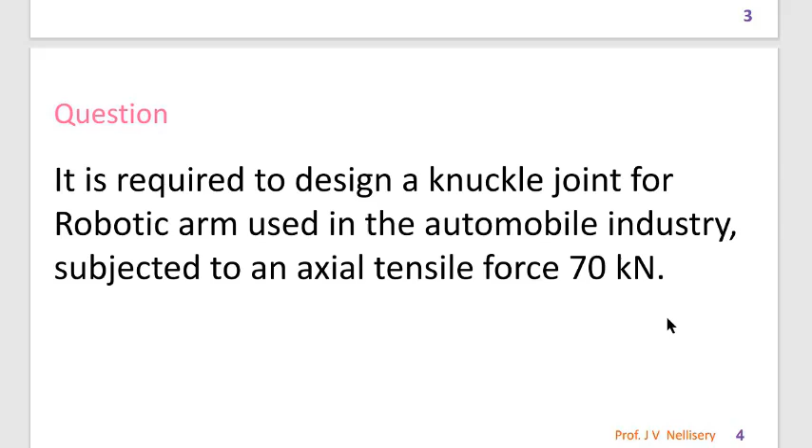Let us look into the question. It is required to design a knuckle joint for the robotic arm used in the automobile industry, subjected to an axial tensile force of 70 kilonewton.

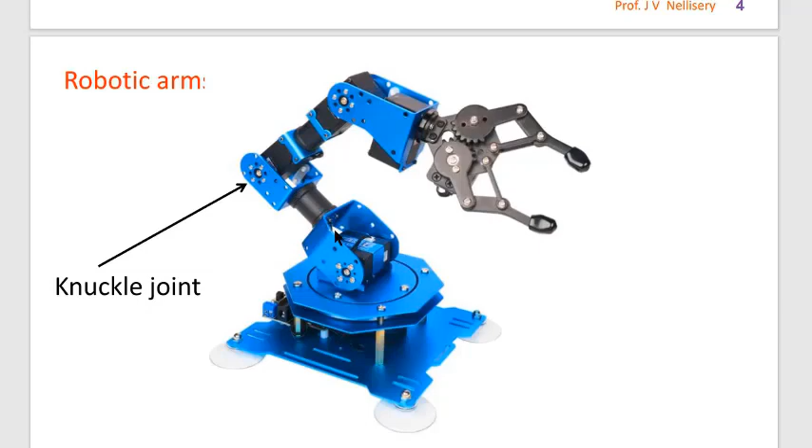This is the picture of the knuckle joint. As you can see, here you have the fork end and here you have the eye. The eye is further connected to another eye, and the fork is connected to another fork. So we will be designing this particular part.

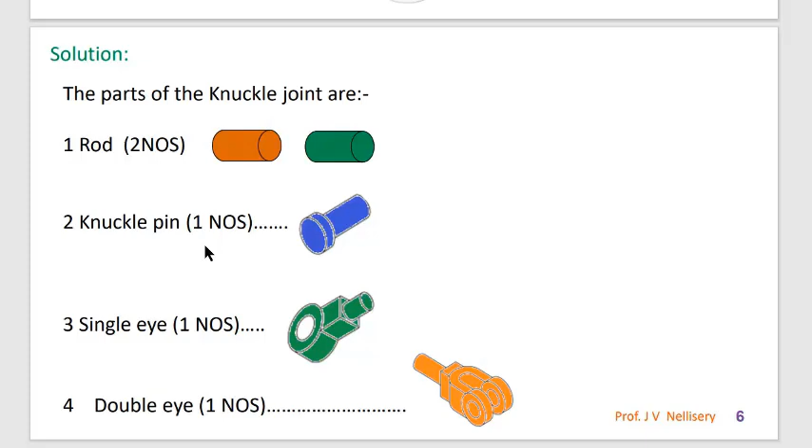Let us take a simplified version of the knuckle joint. These are the parts of the knuckle joint. We have a rod, which consists of the fork as well as the eye end. There is a knuckle pin, which connects the fork and the eye. The single eye looks like this. We have a double eye, also called the fork. These are some of the parts in the knuckle joint.

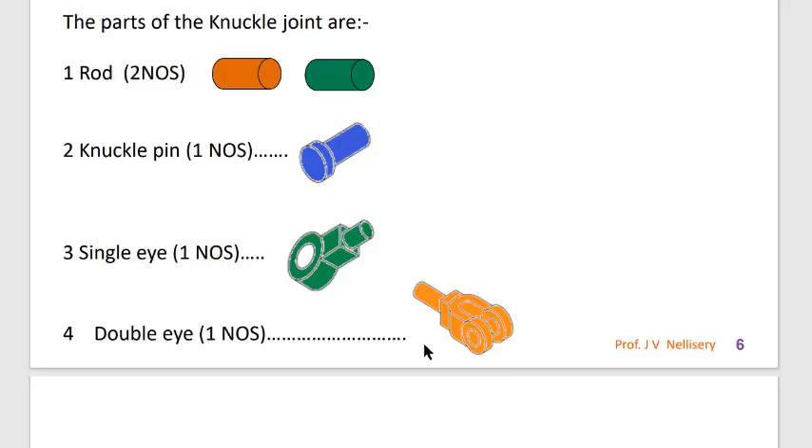The assembly of the knuckle joint consists of something like this, where the single eye comes and mates with the double eye. The single eye leaf looks like this, whereas the double eye has two leaves. The single eye is placed in between the leaves of the double eye. After this, the knuckle pin passes through the double eye and the single eye. Hence, we form the assembly of the knuckle joint. It's a very simple assembly and it is easy to manufacture, and you can observe the knuckle joint in many joints nearby.

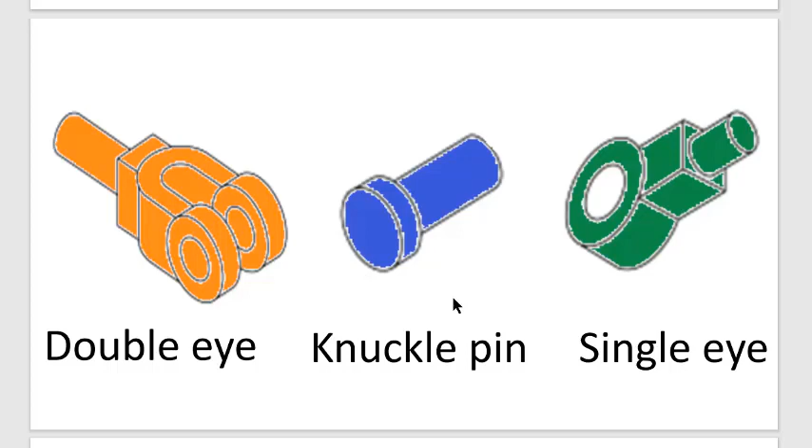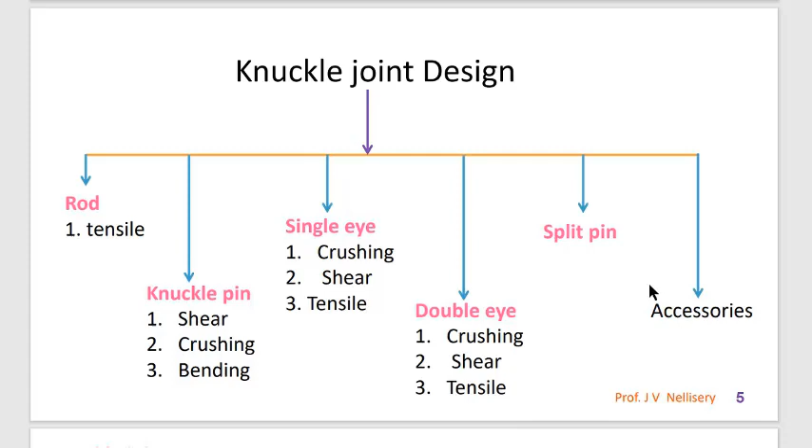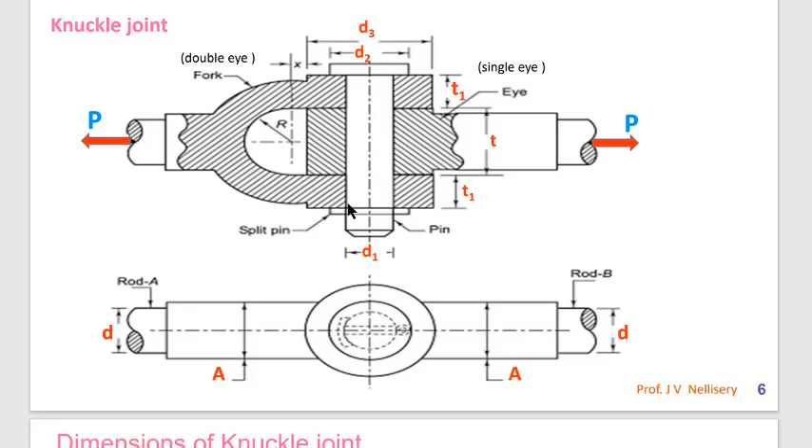Let us look into the assembly diagram of the knuckle joint. Here you can see the double eye and the single eye, through which the pin passes. D1 is the diameter of the knuckle pin, whereas D2 is the diameter of the knuckle pin head. D3 is the outer diameter of the leaf of the fork as well as the eye. The knuckle joint is subjected to a load of P. Here you have thickness T for the eye end and thickness T1 for the double eye end. This is the front view and here we have the top view. The dimensions are defined in this manner. So these are some of the critical parameters with respect to the knuckle joint.

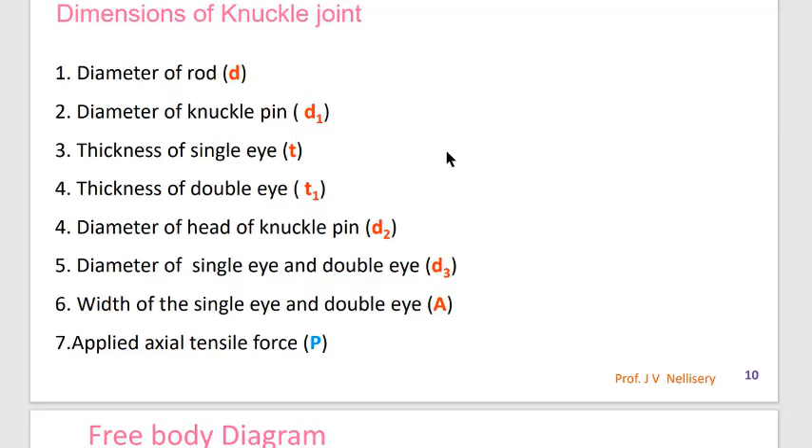Let us look into the free body diagram of the knuckle joint. The knuckle joint is designed with respect to the free body diagram, constructed using the principle that actions and reactions are equal and opposite. The sum of all horizontal forces acting on individual parts must equal zero. Here in the figure there is an applied force P, and because of this, on the double eye there is an induced force P by 2 above and P by 2 below. The total force acting on the double eye cancels out, whereas on the left hand side you can see P, and adding P by 2 and P by 2, the horizontal forces become zero on the double eye.

On the eye end, one can observe that external applied force P is applied. The reaction force for this is the applied force P, which is opposite in direction. Now this is how the horizontal forces on the single eye equal zero.

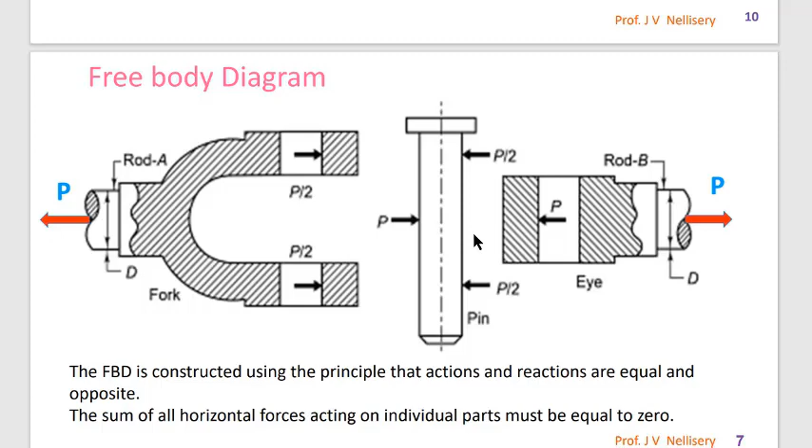Because of this force on the single eye, onto the knuckle pin there is again an equal and opposite force P acting. On the right hand side there is a force P by 2 and P by 2, due to the leaves of the double eye. On the double eye we have a force P by 2 in this direction and P by 2 in this direction. At the same time, there is an opposite force P by 2 on the knuckle pin in this direction, as well as P by 2 in this direction. Both directions are opposite and the magnitudes are equal, and that's why the horizontal forces on the knuckle pin equal zero. Hence, we have understood the forces on the knuckle joint.

Let us look into the assumptions of the knuckle joint. The rods are subjected to axial tensile force. The material is homogeneous, isotropic, and obeys Hooke's law. The effect of stress concentration due to slots and steps is neglected. The force is uniformly distributed in various parts.

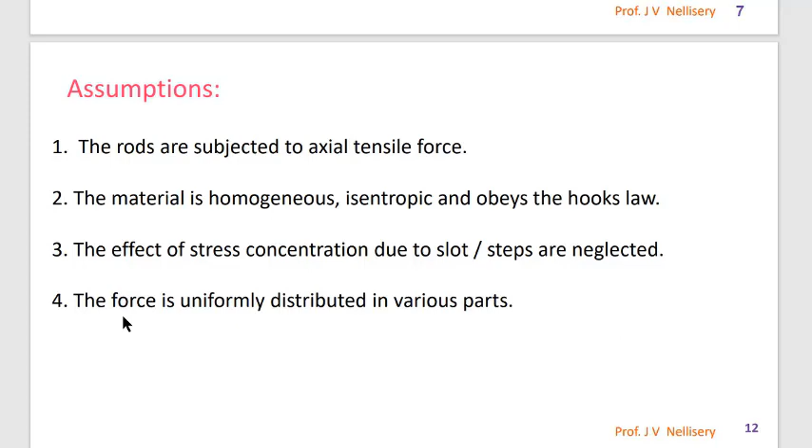Now, the material assigned to all the parts, let us assume it to be the same. We have taken plain carbon steel C40 as the material, and the yield tensile strength for that is 33 kgf per mm square, with reference to design data book PSG page number 1.9. We have selected this material because it is easily available in the factory.

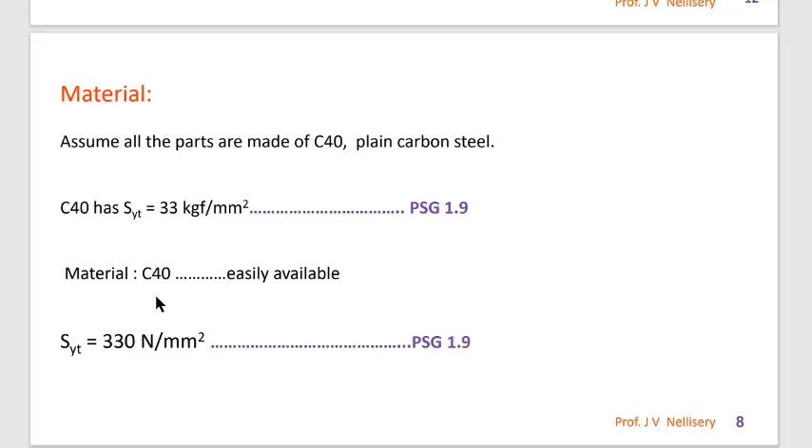Now let us convert this SYT in terms of Newton per mm square. So this becomes 330 Newton per mm square.

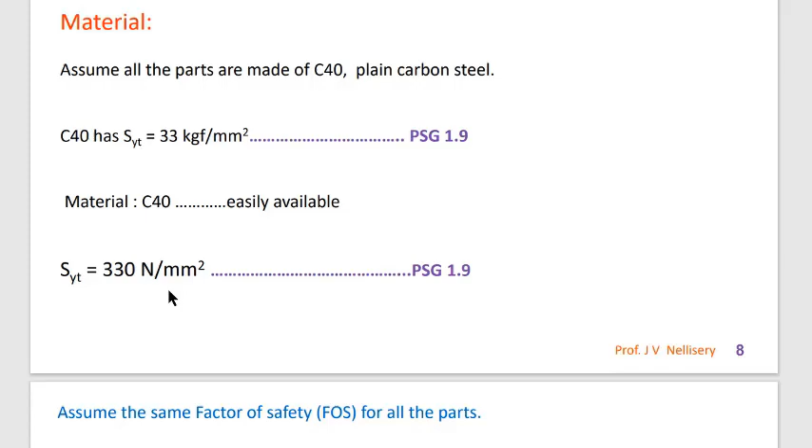Assume the same factor of safety for all the parts with respect to the knuckle joint. For direct axial load, the factor of safety is taken as 2 when it is a dead load, with reference to V M Faires as given in PSG page number 1.43. Hence, for a direct axial load, we have taken factor of safety as 2. An additional factor is taken to accommodate stress concentration factor, that is 1. So when we add this, the final factor of safety becomes 3.

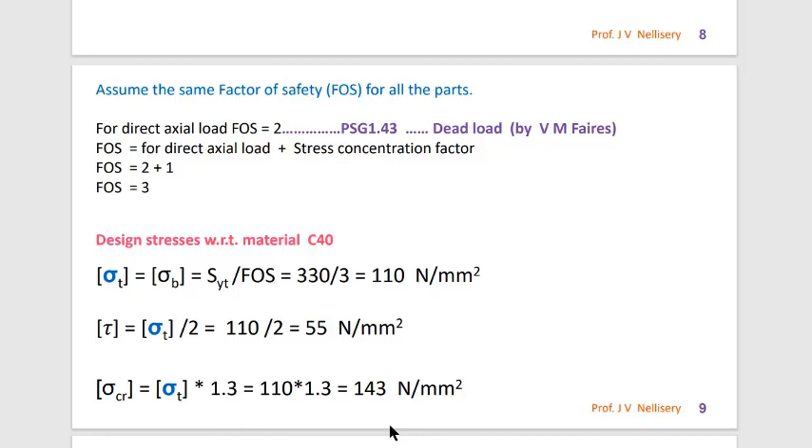Design stresses with respect to the material C40 can be taken in the following manner. Design sigma T is equivalent to design sigma B, which is SYT upon factor of safety, that comes around 110 Newton per mm square. Design tau is equal to design sigma T by 2, so that comes around 55 Newton per mm square, and design sigma CR is equal to design sigma T multiplied by 1.3, so it comes around 143 Newton per mm square. Let us start the design.

So induced sigma T is equal to P upon pi by 4 D square, less than equal to design sigma T. When we put in the values, we can find D as 28.46 mm, which can be approximated to 29 mm.

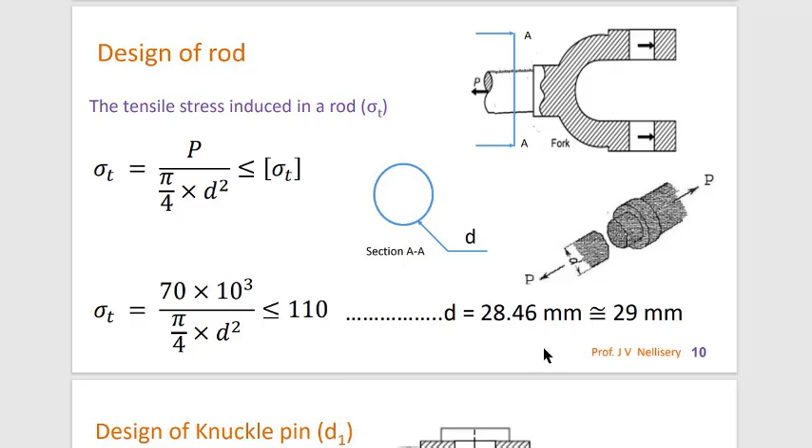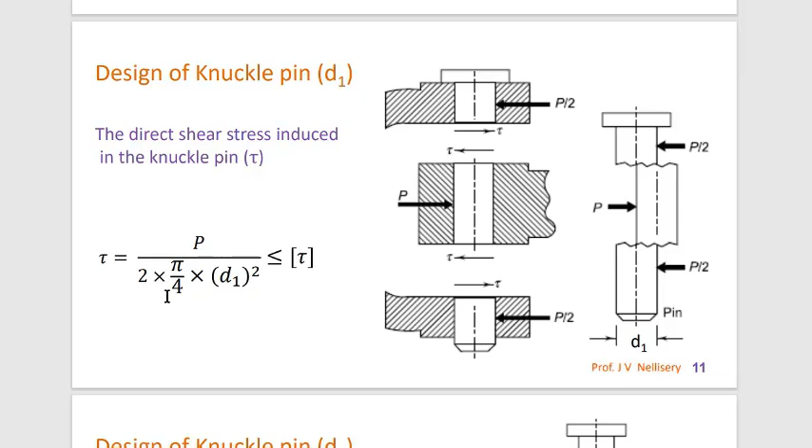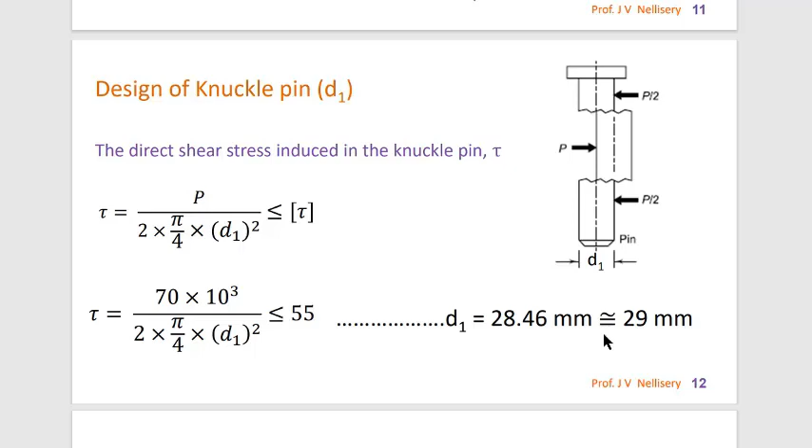This is a double shear condition, and the diameter of the pin, as shown here, is given as d1. So we put it as pi by 4 d1 square. d1 is the diameter of the knuckle pin, and we put the values into the formula, where P is 70 into 10 raised to 3, design tau is 55, and we find the value of d1. Here d1 comes around 28.46 mm, which can be approximated as 29 mm.

Let us look into the crushing stress induced in the knuckle pin due to the single eye end. The knuckle pin picture is given here, and whenever we consider the induced crushing stress, the area considered is always the projected area. Since the whole cylinder is subjected to the crushing stress, the projected area will appear like a rectangle, and the area is d1 into T.

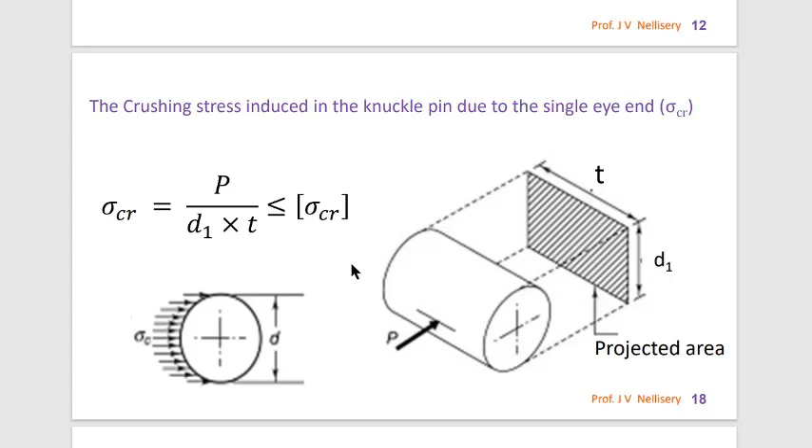In this equation, we know the value of P, we know the value of D1, and we know the value of design sigma CR. So by this formula, we can find out the thickness T of the knuckle pin. Let us place in the known values after substitution. We get the T value as 16.87 mm, which can be approximated as 17 mm.

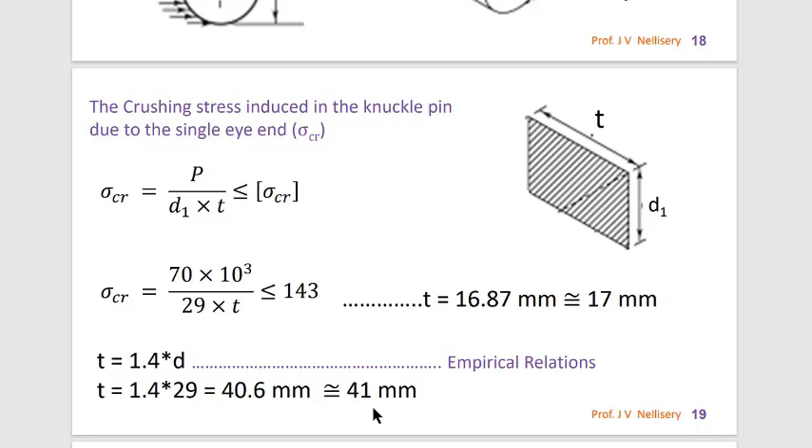Now, using empirical relation, we can say that thickness of the single eye T is equal to 1.4 times D, and therefore T becomes around 40.6 mm, which can be approximated as 41 mm. By experience, they have said that the T value should not be 17 mm, which is very less, but approximated to 41 mm, which is a safe value and depends upon the experience of the designer.

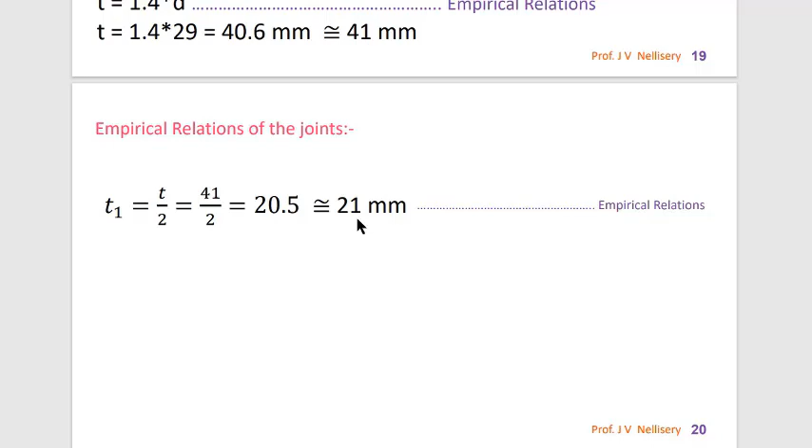We also have another empirical relation for T1. T1 is equal to T by 2, which can be calculated as 20.5 and approximated as 21 mm. Here T1 is the thickness of the double eye.

Let us study the bending stress induced in the knuckle pin. Bending happens due to the opposite forces acting on the knuckle pin with respect to the single eye and the double eye. The bending analysis of the knuckle pin is considered as a simply supported beam with uniformly distributed load acting in the middle portion due to single eye, and uniformly varying load acting in the remaining end portion due to double eye.

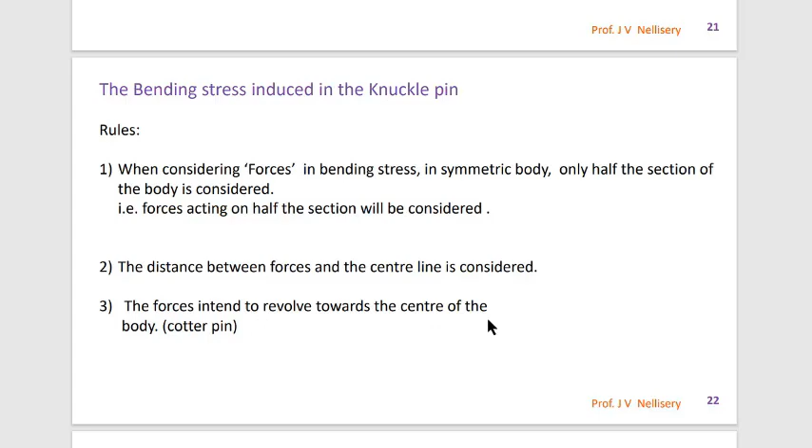When considering forces in bending stress in a symmetric body, only half of the section of the body is considered, that is, forces acting on half the section. Second, the distance between the force and the central line is considered. Third, the forces tend to revolve towards the center of the body with respect to the cotter pin.

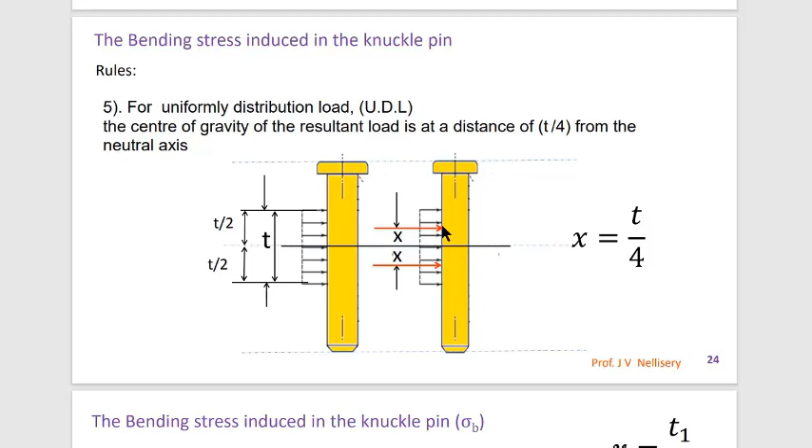Let us look into the uniformly distributed load, UDL. The center of gravity of the resultant load is at a distance of T by 4 from the neutral axis. In the figure, this line is the neutral axis, the central line, and you can see the uniformly distributed load at the upper section and the lower section. Only one section is considered. Looking at the upper section, the point load acts at a distance x, and this x distance will always be T by 4. This is another point to consider.

The uniformly distributed load is divided into two sections, the upper section and the lower section. The length of the uniformly distributed load at the upper section is given as T by 2. In bending stress, we only consider the upper section.

The uniformly distributed load can be converted into a point load as shown in this figure. The point load acts at a distance of T by 4 from the neutral axis, with magnitude P by 2. You can also see that a P by 2 load acts at the bottom section also at distance T by 4.

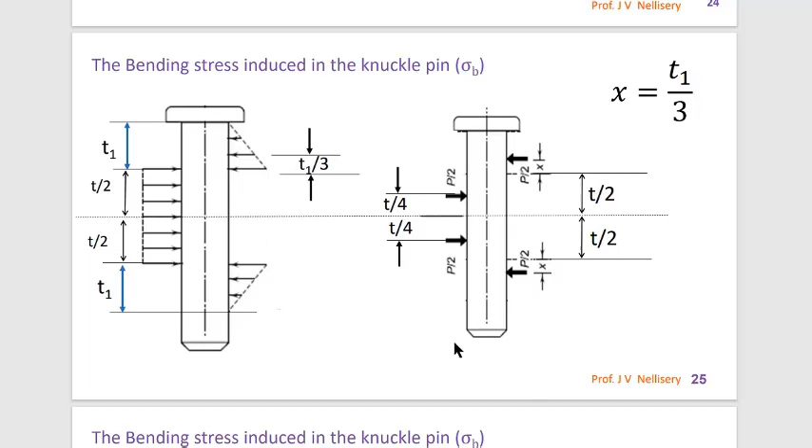Once we understand this diagram, we can find the maximum moment acting on this body. To find the maximum moment, we consider that these forces tend to revolve at the center of the pin. Let us take the force situated at the top, where P by 2 acts at a distance of x plus T by 2. So the force is P by 2, and the distance is T by 2 plus x, where x equals T1 by 3.

We have found the forces and their distances on the right hand side. The force on the right hand side and the force on the left hand side are opposite to each other, so we consider a minus sign for the force on the left hand side. On the left, the force is P by 2, acting at a distance of T by 4, as represented here. From this diagram, we obtain the maximum moment acting on the knuckle pin.

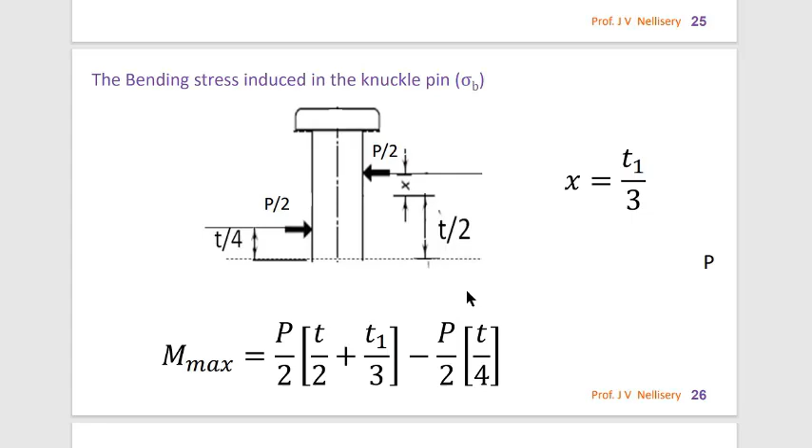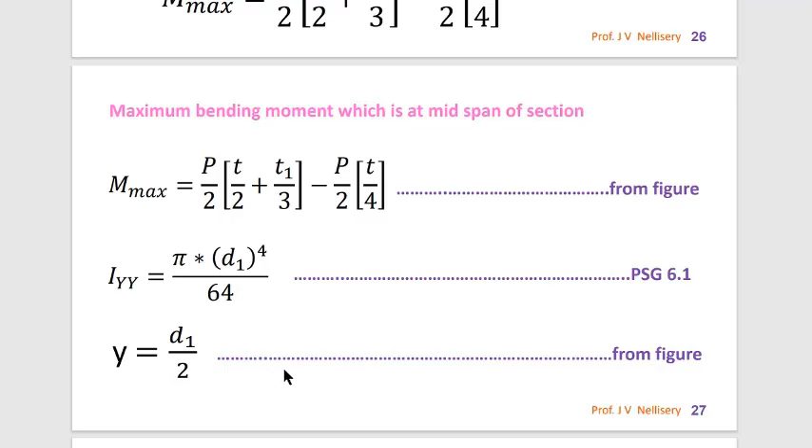Now we have several formulas: the maximum moment is found from the figure, where the area moment of inertia with respect to y is pi into d1 raised to 4, upon 64. This is specific to the circular section as given in PSG 6.1. We can find the distance of the maximum fiber from the neutral axis as d1 by 2, so y equals d1 by 2, the distance of the outermost fiber from the neutral axis.

The bending stress induced in the knuckle pin due to single eye and double eye can be calculated. In this formula, we know the value of M max and the design sigma t, and we can substitute the values of y and Iyy.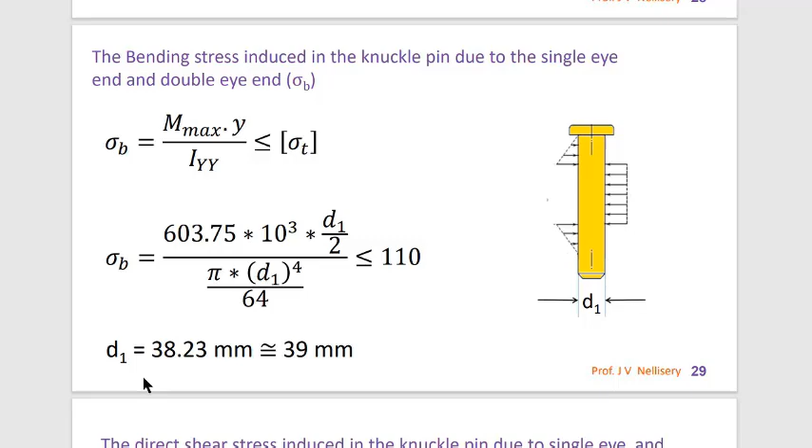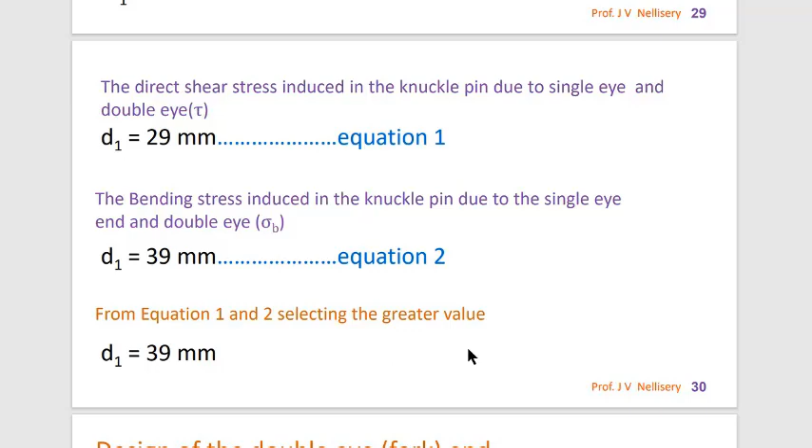In this particular equation, d1 is unknown, where d1 is the diameter of the knuckle pin. After substitution, diameter d1 comes around 39 mm approximately. We observe that we got d1 equal to 29 mm from the direct shear stress induced in the knuckle pin due to single eye and double eye. We also calculated d1 as 39 mm with respect to bending stress induced in the knuckle pin. Hence we have values from two different stresses, and we will be selecting the higher value. Hence, the final dimension of d1 is 39 mm.

The direct shear stress induced in the double eye due to knuckle pin. In this figure, one can observe that the knuckle pin is mating with the double eye. The knuckle pin is pulled in this direction and the double eye is pulled in that direction. Because they are pulled in opposite directions, two sections of the double eye get sheared off as seen in this diagram from this location. Now the shaded area is shown in blue color as seen here. These are the sheared areas which got broken off from the double eye.

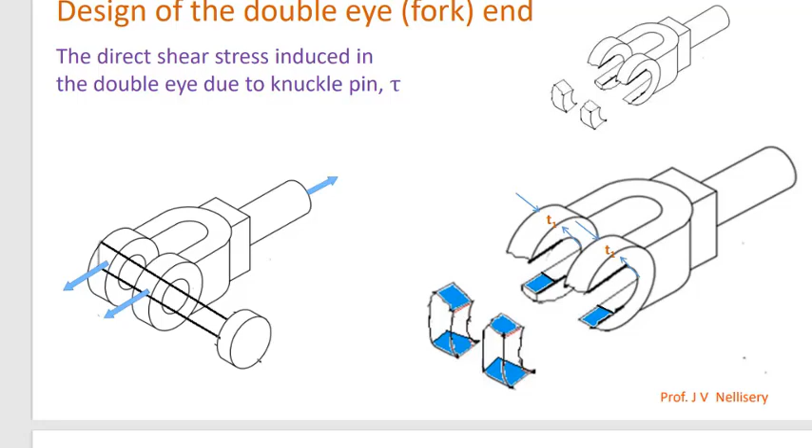Here T1 is known as the thickness of the single leaf. In both the leaves, thickness is T1. Now we are interested in these sections. Let us assume the sheared portion above and below. Here also we have sheared portion above and below. For the two sections we have above and below portions. Let us assume that the shaded portions have the same and equal area. So we are interested to find out this area. One parameter is known here, that is T1, because the thickness of the leaf is T1. So this parameter is T1.

To understand and find out the other parameter, we have to look into this figure. The outer diameter is given by D3 and the inner diameter here is given by D1. If we want to find half the diameter of the outer circle, it is given by d3 by 2, and half the diameter of the inner circle is d1 by 2. Now the red area is the break line, and we are interested to find the length of this line. So the length can be found as d3 by 2 minus d1 by 2. This gives the length of this red colored line. To find the area of this shaded portion, T1 multiplied by d3 by 2 minus d1 by 2 will give the area of the shaded portion.

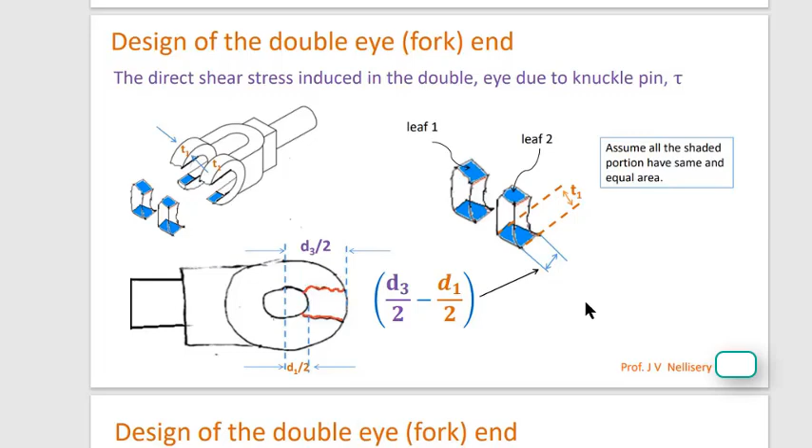Now let us look into the induced tau. The induced tau is equal to P upon area. We have found the area of the shaded portion, so we write that as d3 minus d1 upon 2 multiplied by t1. The first 2 here stands for double shear. Each section has above and below area, and that's why we call it a case of double shear, so a 2 is given for that. Now the rear 2 is for 2 leaves - leaf number 1 and leaf number 2, and that is the reason we have given 2 here. Now in this condition we have found induced tau and its formula.

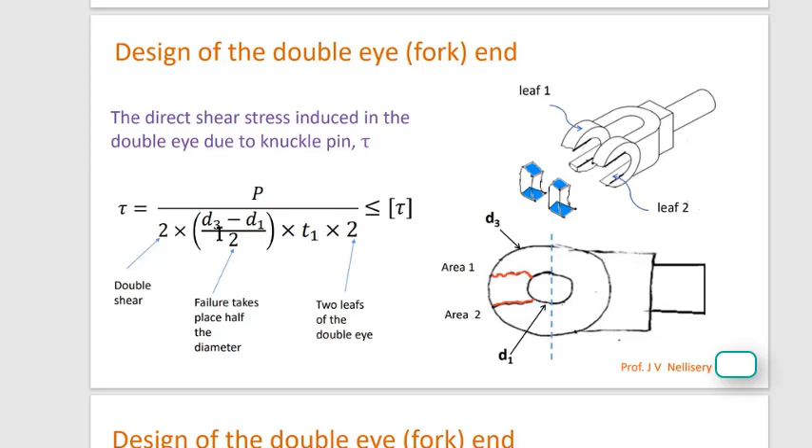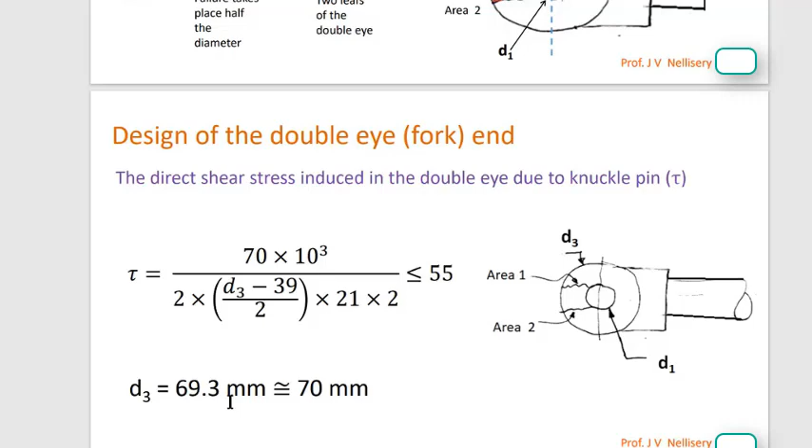Now we can put the known values and find the unknown values. We have substituted the known values, and the unknown parameter is d3. After substituting all values and equating it equal to 55, the d3 value comes around 69.3 mm, which can be approximated as 70 mm.

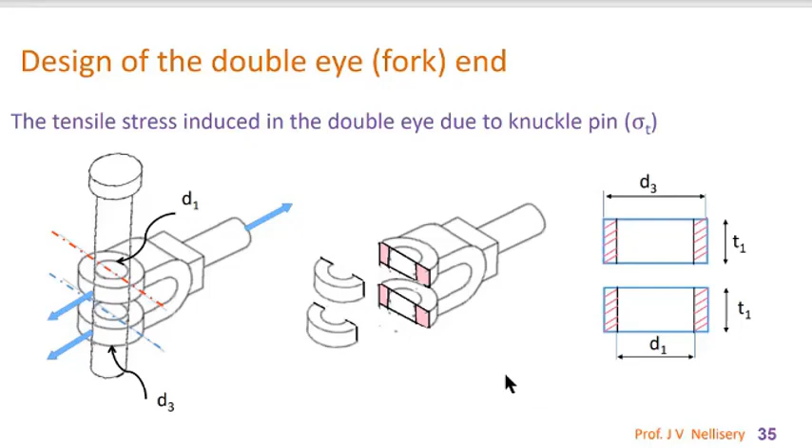Let us look into the tensile stress induced in the double eye due to the knuckle pin. Here the double eye is mating with the knuckle pin, and a tensile force is induced on the left hand side of the pin and on the right hand side of the double eye. Because of these tensile forces, the double eye divides itself into two parts - this is one part and that is the other part. The shaded area is the area under consideration, shown in this 2D diagram. One can observe this is how tensile failure takes place due to the tensile stress in the double eye.

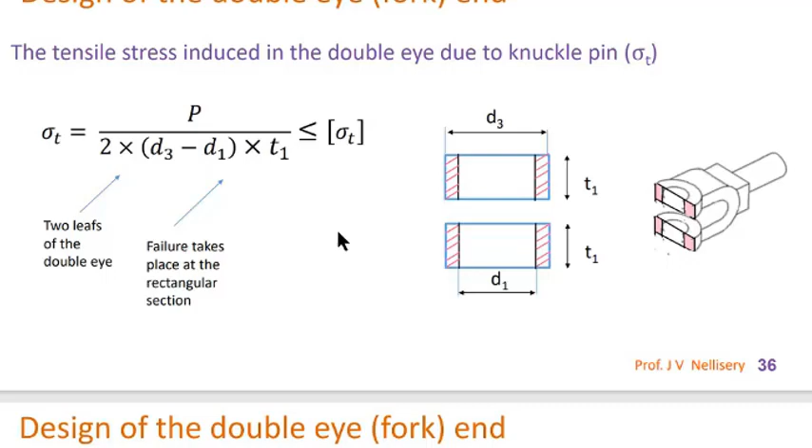Let us look into the calculation. Here the digit 2 is shown for the two leaves - leaf number 1 and leaf number 2. The shaded area can be given as d3 minus d1 multiplied by thickness t1. In this manner we find the shaded area and the formula for tensile stress. Let us put in all known values into the equation and find the induced tensile stress. The induced tensile stress is 53.76, which is quite lesser than the design tensile stress. Hence this section is safe.

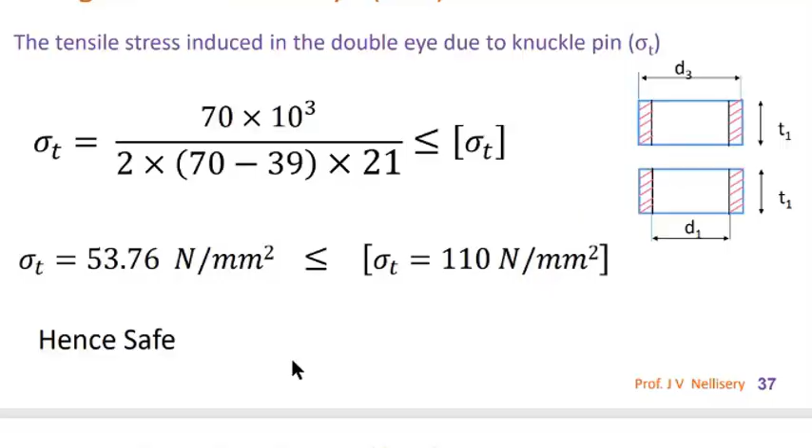Let us look into the crushing stress induced in the double eye due to the knuckle pin.

In this figure, we can observe that the double eye is being mated with the knuckle pin. The knuckle pin is being pulled to one side and the double eye is pulled to the other side. Because of this, the failure of the double eye occurs.

One can observe that the inner area is the crushed area, which is also the circumferential area. In the crushing stress, the circumferential area is converted into the projected area. The projected area appears like a rectangle, and this shaded area is the crushing area. Hence, in this manner, the failure of the double eye due to crushing stress occurs.

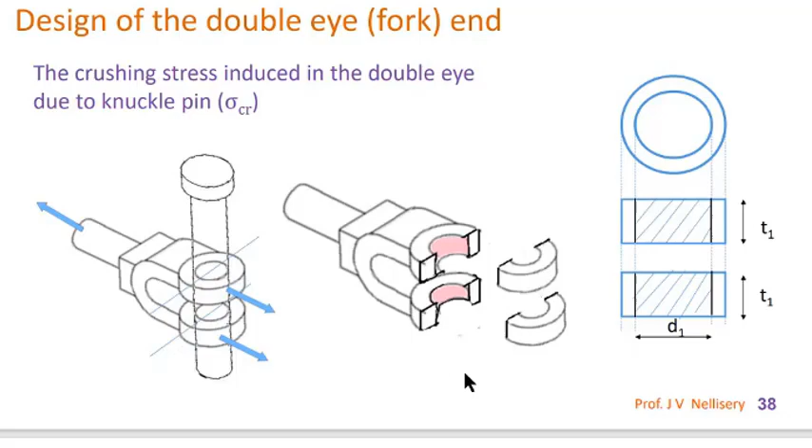Let us look into the formula. The two leaf of the double eye indicates the 2 digit here. Hence, there are 2 leaves, so we have multiplied by 2. The area is d1 multiplied by t1. This is the shaded area. Hence, we have d1 multiplied by t1 in the denominator.

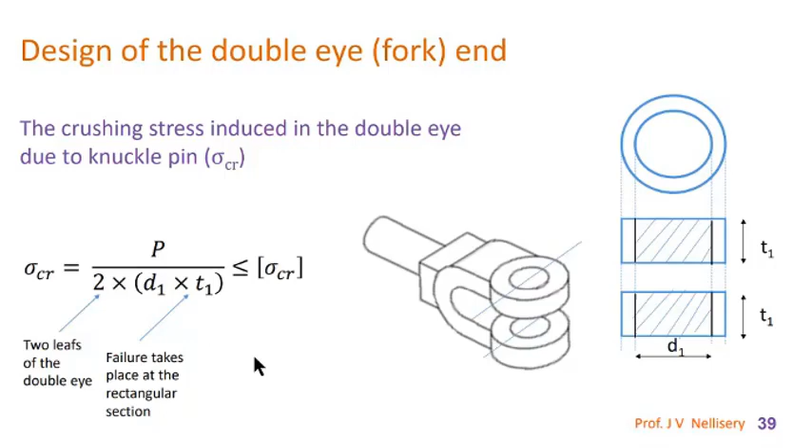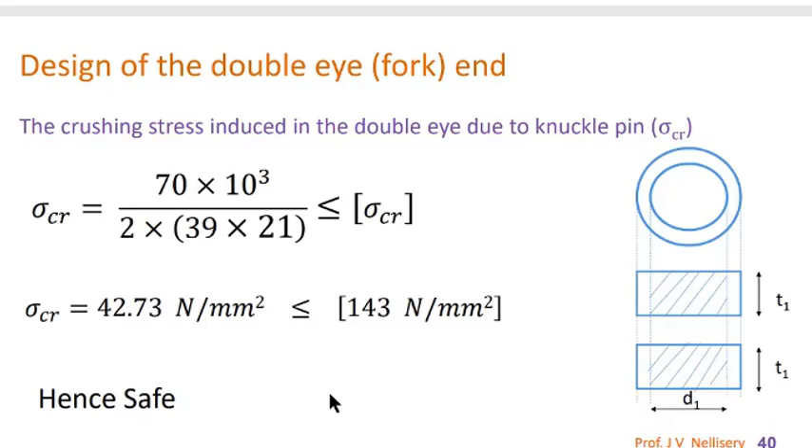Hence, this is the formula and we can put values and find out. After putting the values in the crushing stress, we can find out the induced crushing stress as 42.73, which is quite less in magnitude with respect to the design crushing stress, which is 143. Hence, we can say that this particular section is safe.

Let us consider the direct shear stress induced in the single eye due to the knuckle. Here one can observe that this particular eye end is mated with the knuckle pin, and because of the forces acting on it, this particular section of the single eye gets sheared off.

We can see this nicely in the 2D figure. In the 2D figure you can see the sheared area 1 and the sheared area 2. The small section gets sheared off. This particular section has two areas as shown in this figure. Hence, a digit 2 is multiplied, which indicates a double shear.

The length of sheared area can be said as d3 minus d1 upon 2, since it is half the diameter, and the thickness of the single eye is given as t. Hence, we have obtained the formula for the shear stress.

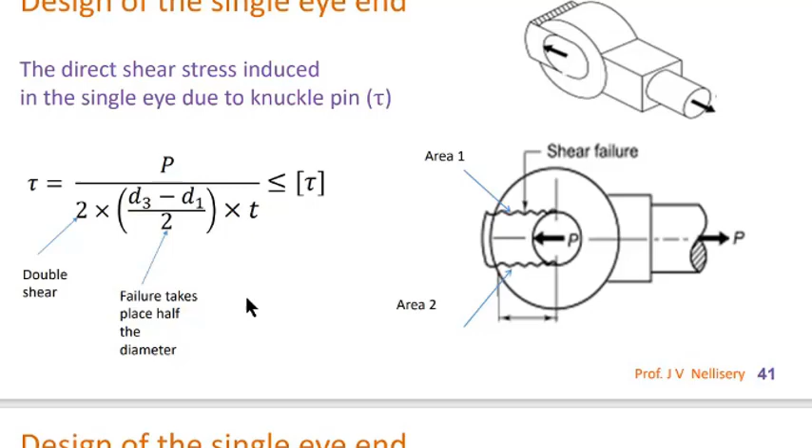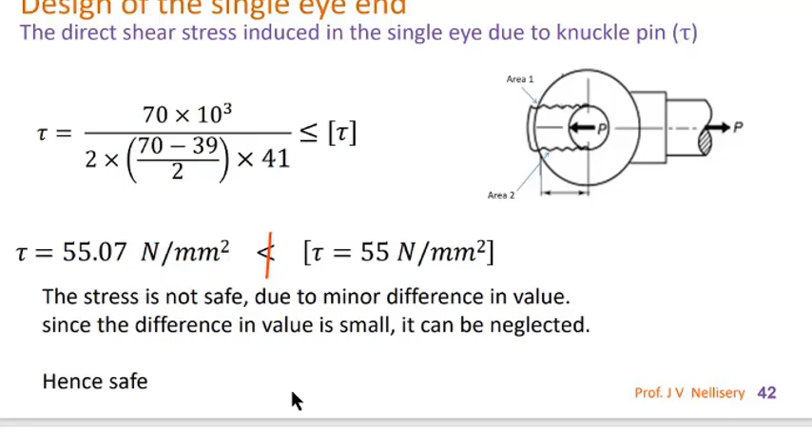Let us put in the values. After putting up the values, we can see that the magnitude of the shear stress is slightly more than the design tau value. This minor difference in the value can be neglected. Hence, we can say that this particular section is safe.

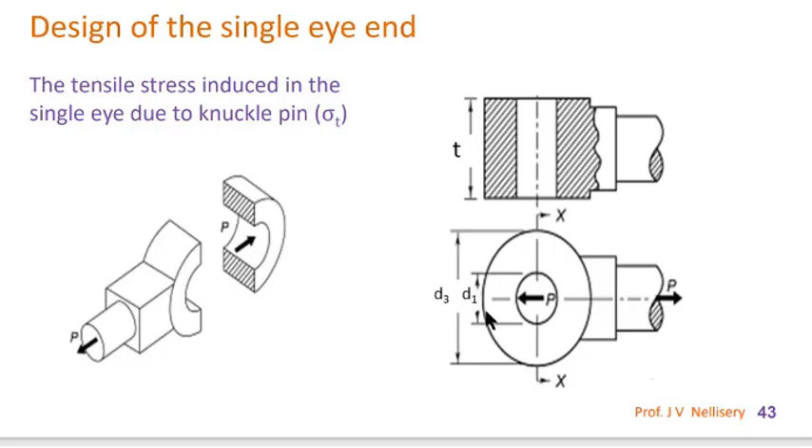In this 2D figure, one can observe that T is the thickness of the single eye, and D3 is the outer diameter of the single eye, and D1 is the inner diameter of the single eye. Let us derive the formula.

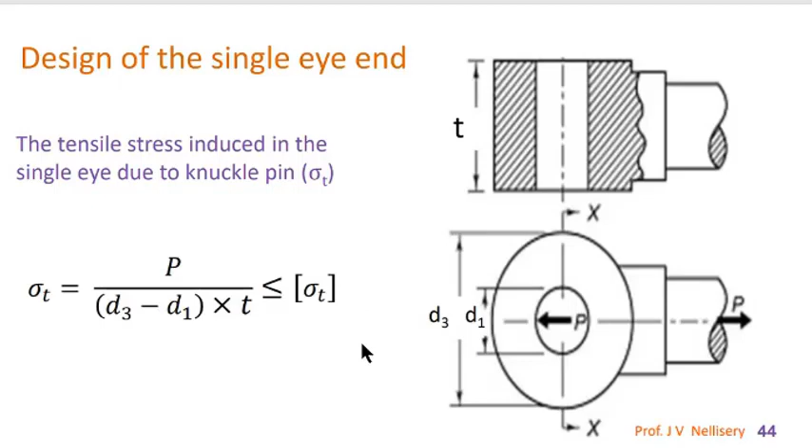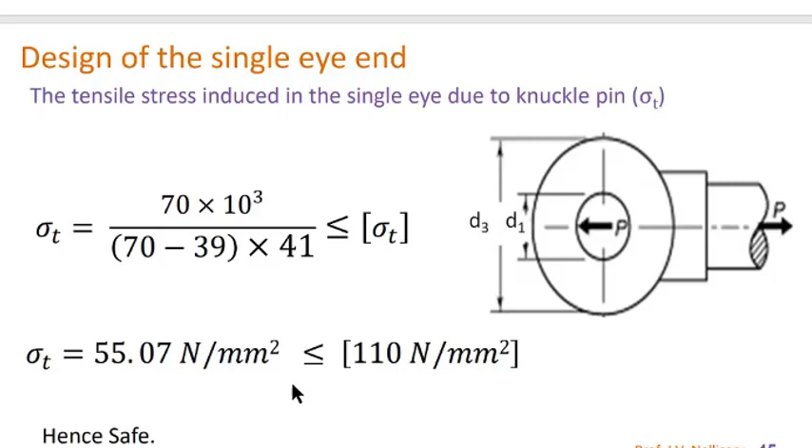The shaded area here can be derived as D3 minus D1 multiplied by T. So we get the shaded area. The shaded area is the tensile area. After putting in the values, one can observe that the induced tensile stress is 55.07 Newton per mm square, which is quite less than the design tensile stress. Hence, the section is safe in tensile stress.

Let us look into the crushing stress induced in the single eye due to the knuckle pin. Here we can see that the single eye and the knuckle pin are mating each other, and due to the forces, the inner surface of the single eye gets stressed. The inner surface is the circumferential area.

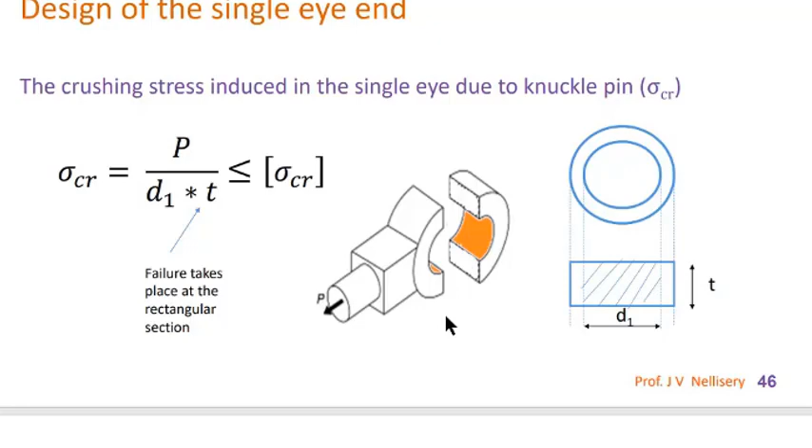One can see that in crushing stress, the circumferential area is converted into projected area. Here, the projected area looks like a rectangle. This rectangle is the crushing area. Hence, due to the crushing stress, the failure happens in the following manner.

Let us put in the values and find out the induced crushing stress. After putting up the known values, the induced crushing stress comes around 43.77 Newton per mm square, which is quite less than the design crushing stress. Hence, the section is safe.

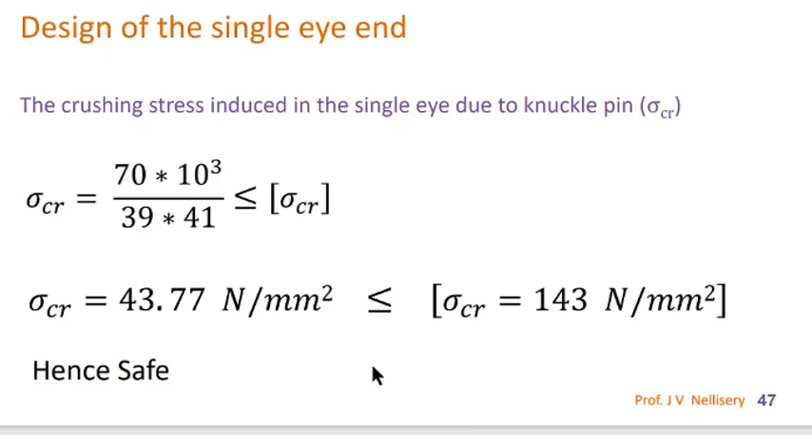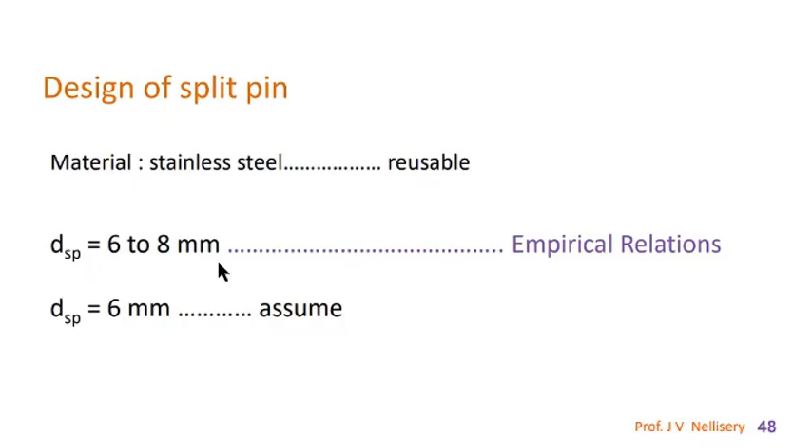Design of the split pin. The design of the split pin moreover depends upon the empirical basis. Let us select the material as stainless steel, and the diameter of the split pin can be somewhere between 6 to 8 mm. Let us assume it to be 6 mm.

Let us look into the dimensions of the knuckle pin. Diameter of the pinhead is represented as dh. dh is 1.5 times the diameter of the rod. After putting up the values, we get it as 43.5 mm.

Thickness of the pinhead is given as tph. Assume it to be 10 mm. The length of the knuckle pin depends upon the thickness of the single eye and the thickness of the double eye, and added some margin. After putting up the values, the length of the knuckle pin comes around 93 mm.

At this point, we can say that we have completed the design.